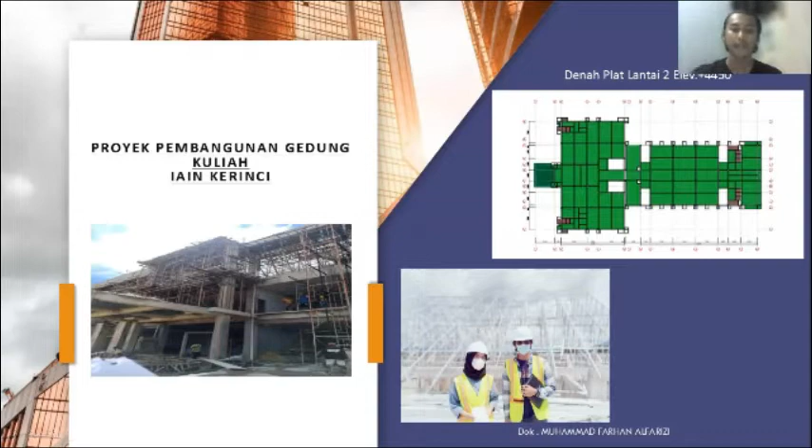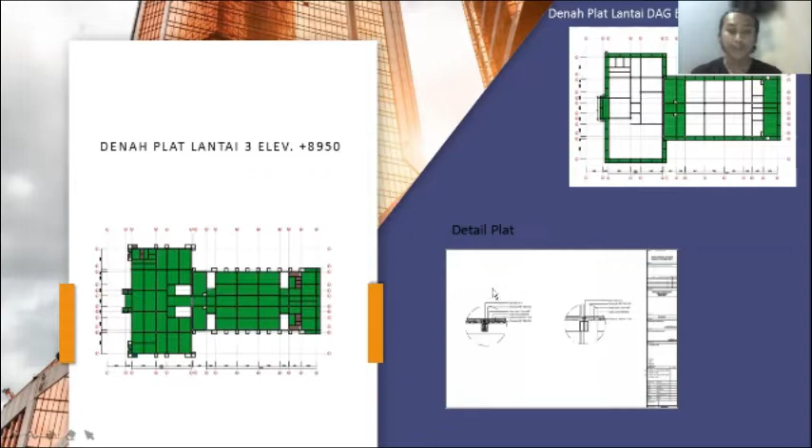Next, we can see floor plan 3, elevation 8,950, and this one is floor plan deck, elevation 13,500, and right here we can see plate detail. Next, we can see casting.

First, ready mix K175 concrete specification: compressive strength 175 kg per centimeter square, mixture cement 300 kg, split stone 1010 kg, stone ash 200 kg, sand 1 262 kg, sand 2 413 kg, water 180 liters, admixture 0.09 liter, density 2,365 kg.

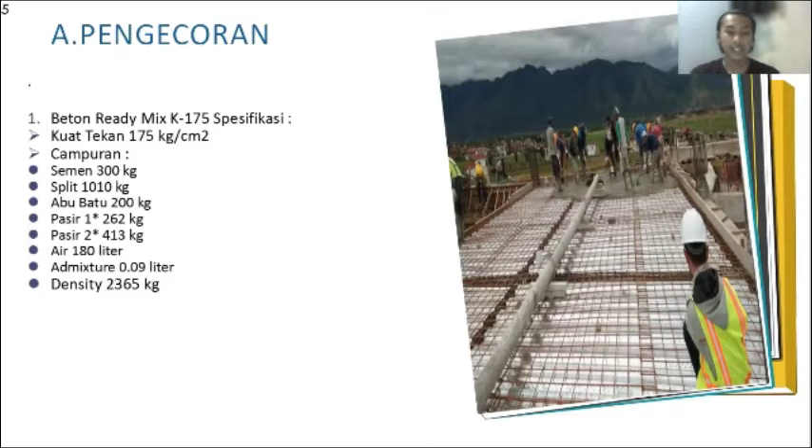Next, we talk about framework. Right here we can see plain iron. The specification is made of steel, size diameter 10 mm, BJTP 24 steel quality, good iron condition, straight and not rust. Next, we can see concrete wire specification, made of galvanized stainless, size 1 roll equal 1 kg. Wire is in good condition and does not rust.

Next, we can see wire mesh specification: wire mesh sheet, width 5.4 meters, length 2.1 meters, iron size 8 mm thread, box diameter 15 cm times 15 cm. Wire mesh is in good condition and doesn't rust. Next, we can see steel deck or smart deck specification: steel deck sheet, width 3 meter, length 1 meter, size 0.7 mm BMT, good condition.

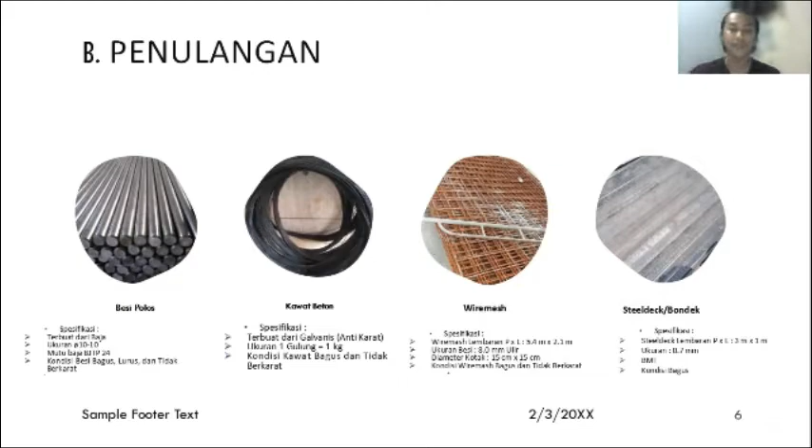In this slide, we can see formwork. The first one is multiplex specification, size 1,220 times 2,440 millimeters by 9 millimeters thickness, in good condition of wood, straight and not weathered. Next is batten specification, size 2 times 4 cm, B quality wood, good condition of wood, straight and not weathered.

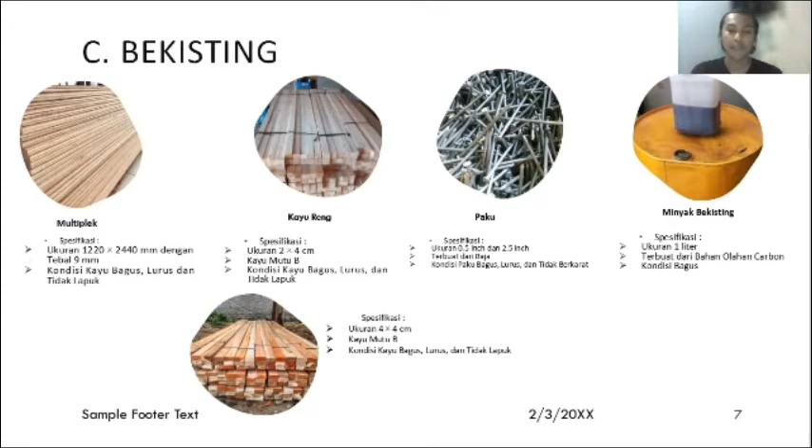Next is nail specification, size 0.5 inch and 2.5 inch, made of steel, nail in good condition, straight and not rust. Next is formwork oil specification, 1 liter size, made from processed carbon, good condition. Next, we can see block wood specification, size 4 times 4 centimeters, B quality wood, good condition of wood, straight and not weathered.

And next slide, we can see work method. In the implementation of the steel deck floor slab casting work on the IAIN Kerinci Building Construction Project, the implementation process is almost the same as conventional floor slab casting.

Next, we talk about steel deck working method. The use of steel deck on this floor slab in the process of making formwork is almost the same as conventional concrete slab. The difference is that steel deck is used as a formwork forming material to replace multiplex on conventional slab. The steel deck is a factory product, and for standard and strength, it has been designed by the company that produced this product.

Next, we talk about steel deck placement. The process is steel deck is lifted, then steel deck or smart deck is placed in a predetermined place. Steel deck is then compiled and placed by workers. Second, steel deck cutting. The process is as follows. After the steel deck has been arranged, it needs to be linked, and a special tool is used, a special clamp tool. But in this project, the steel deck is directly overlapped to be assembled.

Next, for the edges of this steel deck material plate, it is placed to support a minimum of 2.5 cm on the edge of the beam. The next step is the cutting process. In this project, the process uses a hand grinding machine. This cutter should use a special steel nibbler cutter tool. Nibbler cutter is a cutting tool specially designed for cutting steel materials. The steel deck part that exceeds the floor limit is cut according to field condition, as shown in the picture.

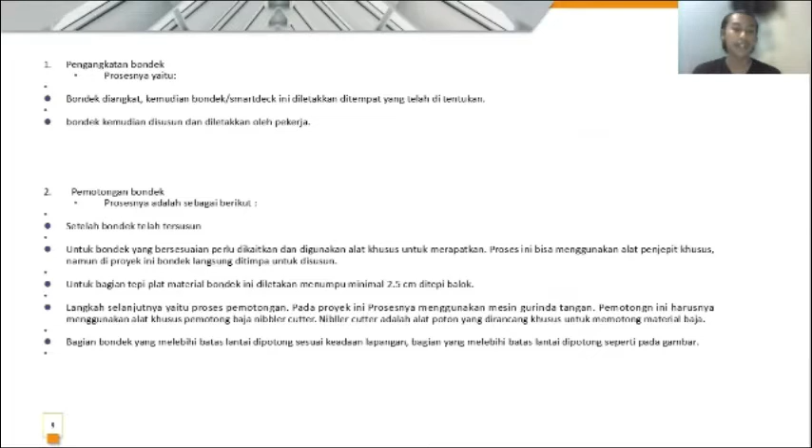The third is steel deck linking. How to do it? The first step is to place the stud bolt in the planned place, namely the edge of the steel deck and the steel deck beam. Then use a power gun to lock or link the steel deck.

Fourth, install end stop. The next step is to install an end stop that has a function so that later during the concrete casting process it doesn't spill. The end stop is attached to the edge of the steel deck by being bolted directly to the steel deck. But previously, the end stop was cut as needed with a hand grinder.

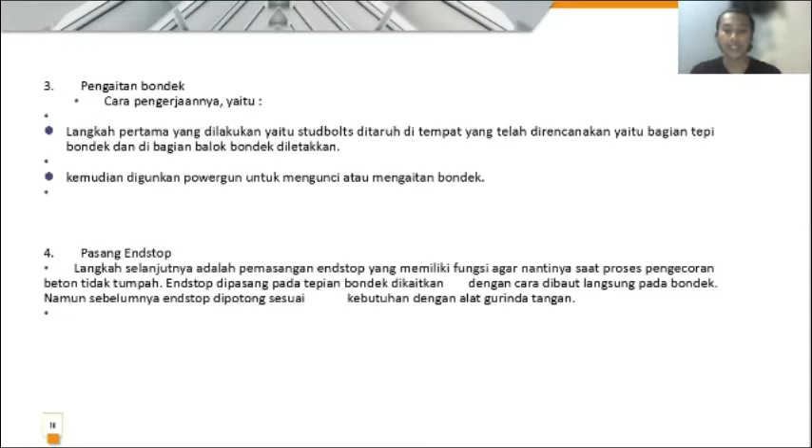Next, we talk about reinforcing. First one is shear connector installation. This work is done before placing the wire mesh sheet. Shear connector is a reinforcing steel that has the function of iron as a shear connector. The shear connector is welded on the surface of the steel deck plate, as well as a wire mesh support to be attached to the steel deck. The binding process applied in this project is by welding.

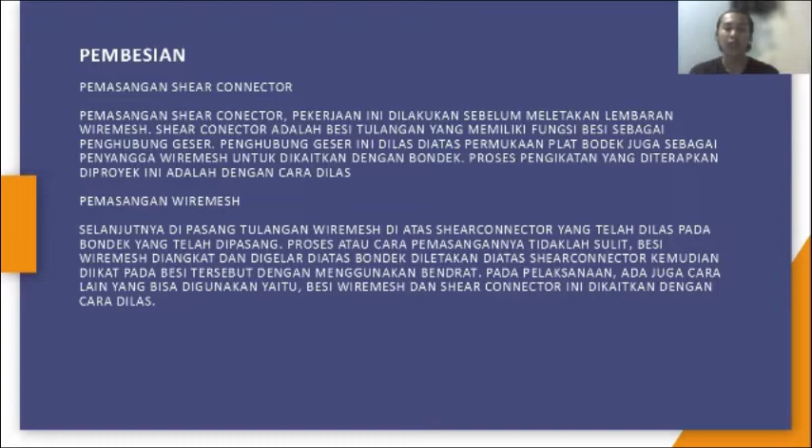Second, wire mesh installation. Next, the wire mesh reinforcement is installed above the shear connector that has been welded to the steel deck that has been installed. The process or method of installation is not difficult. The wire mesh iron is lifted and held over the steel deck, placed on the shear connector, then tied to the iron using a wire. In the implementation, there are also other ways that can be used, namely iron wire mesh and shear connector are linked by welding.

Next, we talk about casting. This process is not much different from casting on conventional plates. However, before the casting process is carried out, the first step that needs to be done is the installation of scaffolding that serves to support so that there is no decrease in the casting. The working steps of the casting process are as follows.

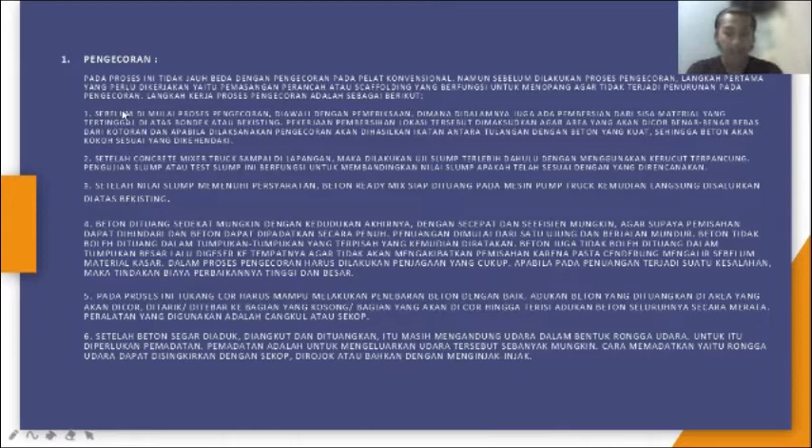The first one, before starting the casting process, it begins with an inspection in which there is also cleaning of the remaining material left on the steel deck or formwork. The site cleaning work is intended so that the area to be casted is completely free of dirt, and when casting is carried out, a strong bond between the reinforcement and concrete will be produced so that concrete will be solid as desired.

Second, after the concrete mixer truck arrives in the field, a slump test is carried out first by using a truncated cone. The slump test serves to compare the slump value whether it has been as planned. Third, after the slump value meets the requirements, ready-made concrete is ready to be poured on the pump truck machine and then directly distributed over the formwork.

Fourth, concrete is poured as close to its final position as possible, as quickly and efficiently as possible, so that separation is avoided and the concrete is fully compacted. Pouring starts at one end and goes backward. Concrete should not be poured in separate piles, which are then leveled. The concrete should also not be poured in large piles and then shifted into place so as not to cause separation, as the paste tends to flow before the coarse material. In the casting process, adequate care must be taken. If there is an error in casting, then the repair costs are high and large.

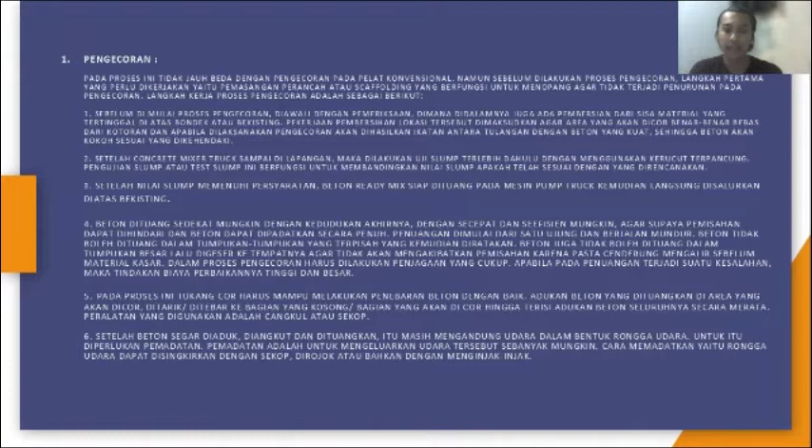Sixth, after fresh concrete is stirred, transported, and poured, it still contains air in the form of air voids. It requires compaction to remove as much of the air as possible. The air cavity can be removed with a shovel, rodding, or even by trampling.

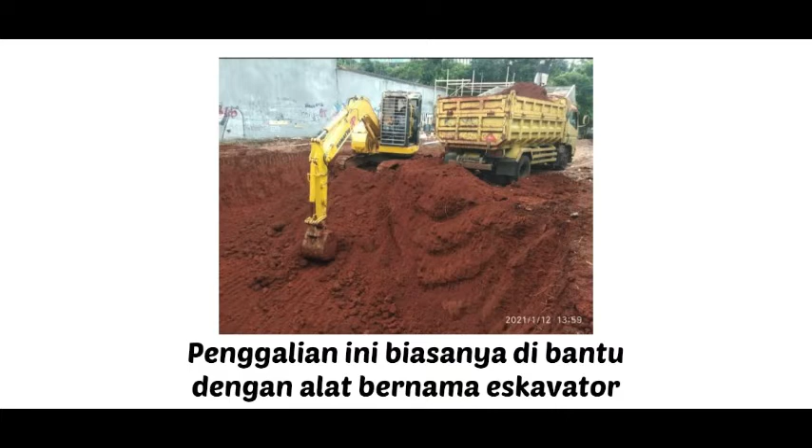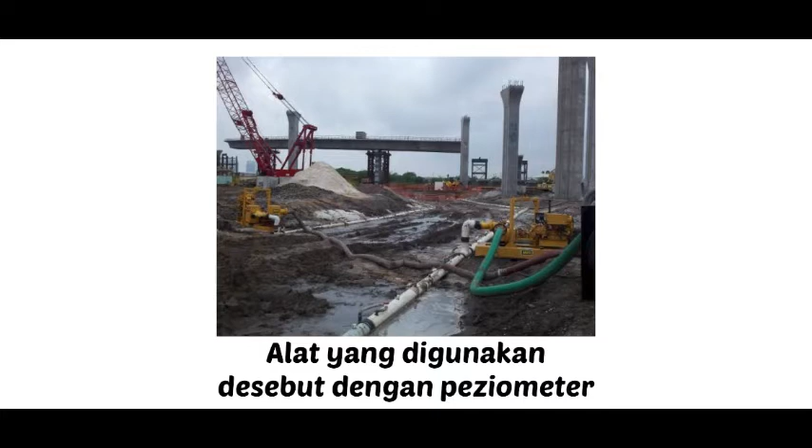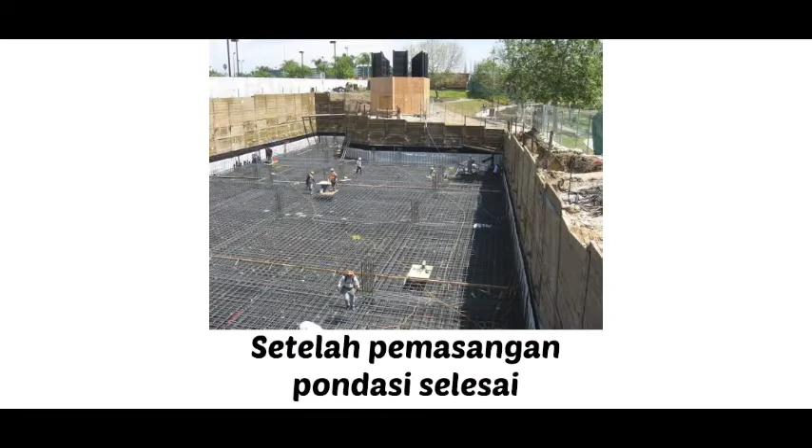This is about building basement construction. The first step is the excavation. This excavation is assisted by a tool called an excavator. Then the next step is the dewatering or draining the soil. The tool used for the dewatering is a piezometer. And the next step is the installation of foundation, usually with a pile foundation. After the foundation is complete, the next step is the manufacture of reinforced concrete, usually done manually.

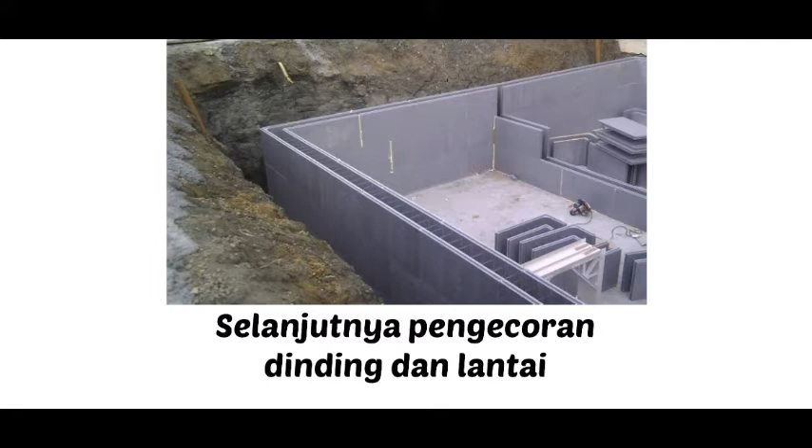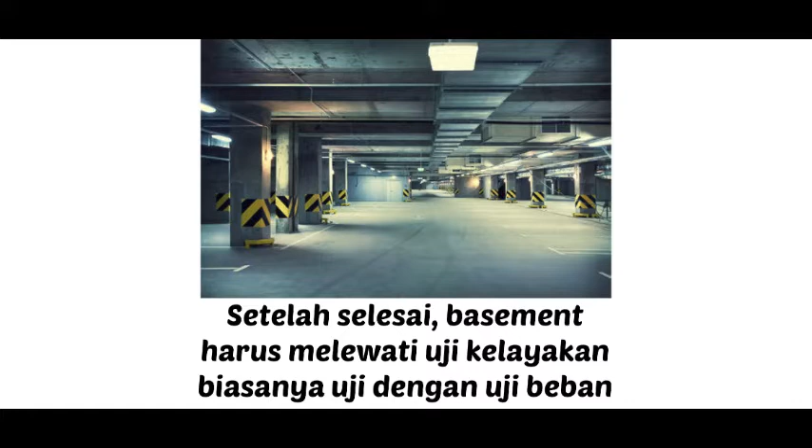And the next is the casting to make the walls and floors. The last is finishing, such as the installation of electrical installation and the water pipes. After completion, the basement must pass a feasibility test, usually using a load test.

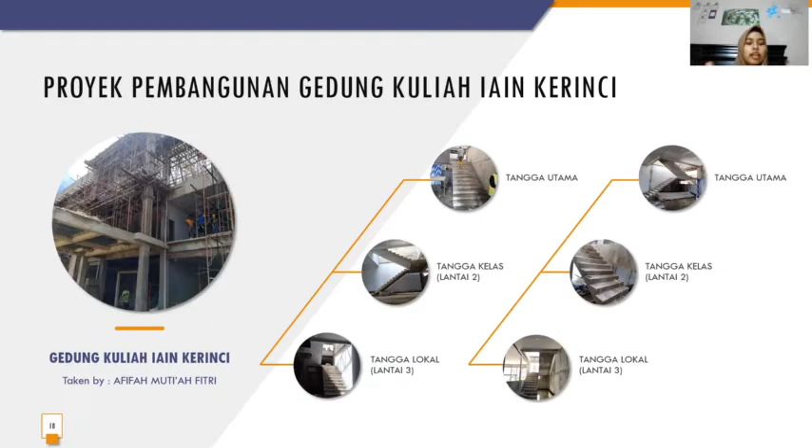And now I'm going to do a presentation about stairs. This is the building that I went to, exactly in IAIN Kerinci Sungai Penuh. And as you can see, there are the main stairs, class stairs on the second floor and on the third floor.

This part I'm going to show you how to make a cast concrete staircase. Number 1, make a stair foundation. Generally, the type of foundation used is a pair of river stone foundation, reinforced concrete, or you can also use a combination of both.

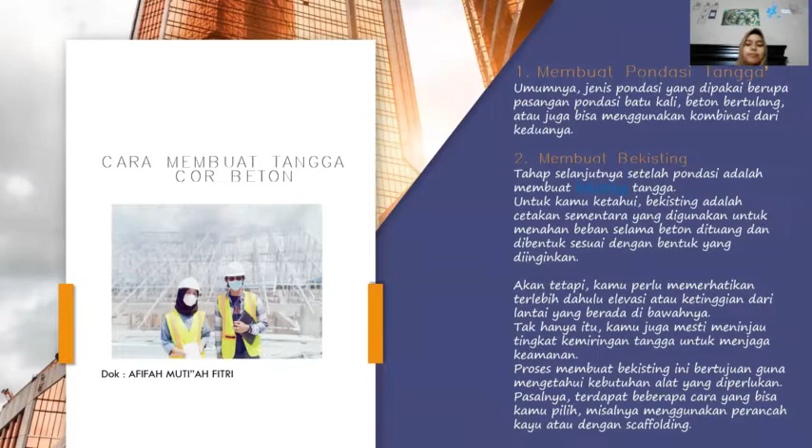Number 2, make framework. After the foundation is there, make the stair framework. You have to know the elevation or height of the floor below. But also you have to know the level of the slope of the stairs to maintain safety. Number 3, installing reinforcement of the body and building frame. First, you need to install the main reinforcement followed by a series using strap reinforcement.

Number 4, installation of stairs reinforcement. To avoid errors, the reinforcement concrete stairs will be continued to be poured of the stairs reinforcement by wire bonding. Then reinforcement was installed lengthening with the purpose to make the stairs stronger. Concrete decking is also installed on the same side as the form.

Now, if the progress of installation of the borders, reinforcement and the stairboard has been completed, you can install the stairs walls on the other side and the border walls at the upper part of the stairs body. This stairs wall form will be nailed to the stairs body form.

Number 5, casting progress. The casting progress must be performed entirely on the stairwell. After finish, lift a few times. Meanwhile, the progress of dismantling the walls of the stairs and the traps can start when the concrete has reached about 12 hours. This is to review the strength of concrete.

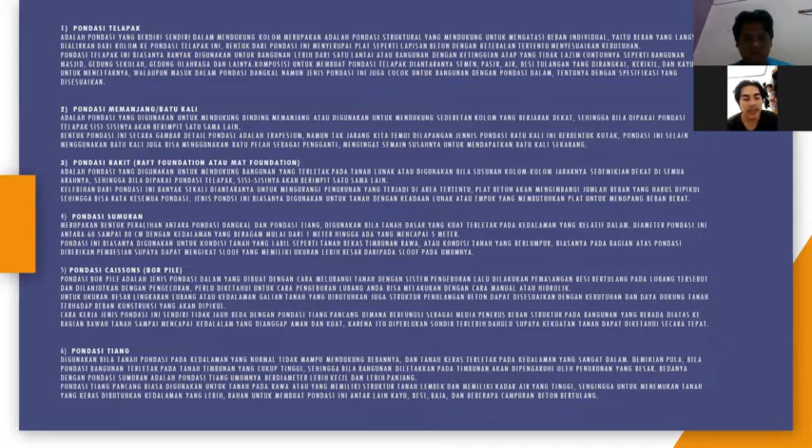Number 3, raft foundation or mat foundation is a foundation that is used to support buildings located on soft soil or used when the columns are so closely spaced in all directions that if a flat foundation is used, the sides will coincide with each other.

The advantages of this foundation are many, including to reduce the settlement that occurs in certain areas.

The concrete slab will compensate for the amount of load that must be carried so that all foundation can be flat. Number 4, well foundation is a transition between shallow foundation and pile foundation, used when the strong subgrade is located relatively deep.

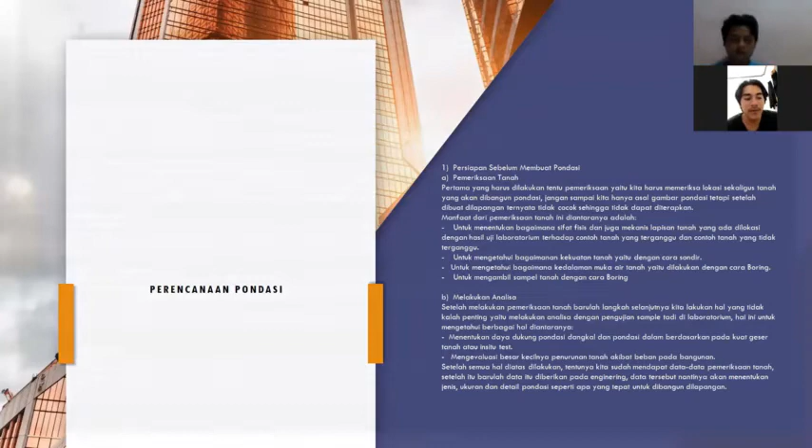The diameter of this foundation is between 60 and 80 cm, with various depths ranging from 1 meter up to 5 meters. The foundation is usually used for unstable soil conditions, such as former swamp embankment soil or muddy soil conditions. Usually the top of the foundation is given iron so that it can bind the sloof, which has a larger size, than the sloof in general.

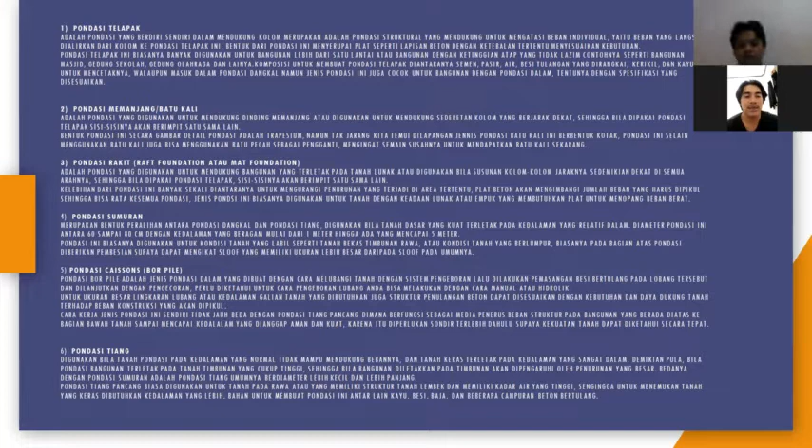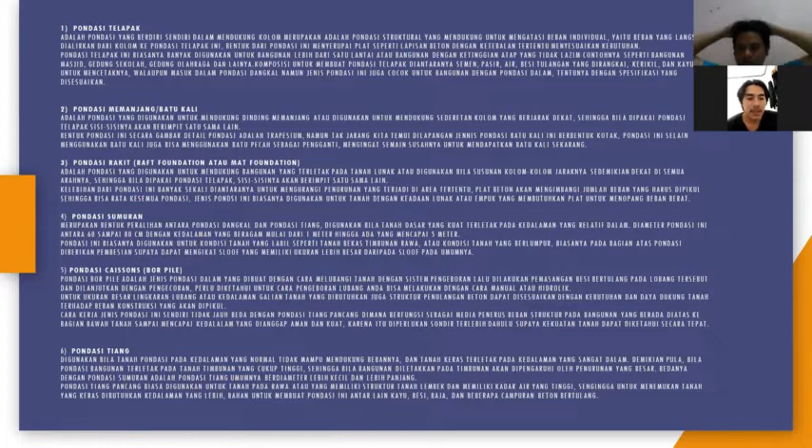Number 5, bored pile foundation. Bored pile foundation is a type of foundation made by perforating the ground with a drilling system and then installing reinforced iron in the hole, followed by casting.

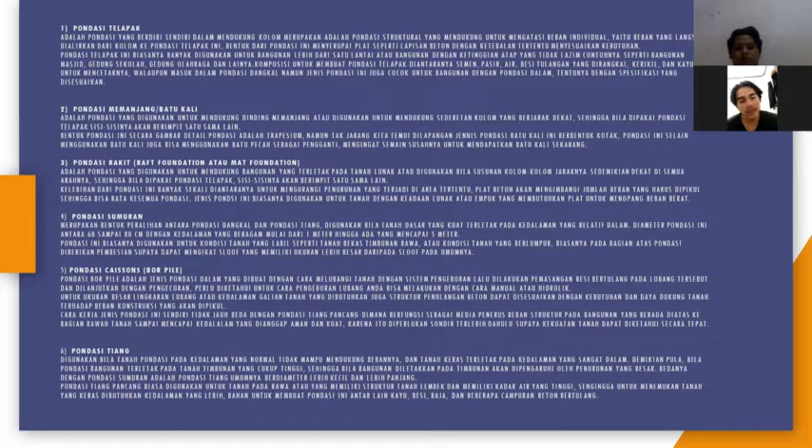Please note how to drill holes. You can do it manually or hydraulically for the large size of the hole circle or the required depth of soil excavation. The concrete reinforcement structure can also be adjusted to the need and carrying capacity of the soil and the construction load to be carried.

Number 6, pile foundation, used when the foundation soil at normal depth is not able to support the load, and hard soil is located very deep, like this. Or if the foundation of the building is located on a sufficiently high embankment, so that if the building is placed on the embankment, it will be affected by a large settlement. The difference with the well foundation is that the pile foundation is generally smaller in diameter and longer.

Okay. Next, I will continue the presentation of foundation planning. Number one, preparation before making the foundation. A. Soil inspection. The first thing that must be done of course is inspection. Normally, we have to check the location as well as the soil to develop the foundation. Lest we just come up with a foundation drawing, but after it is made in the field, it turns out not suitable, so that it cannot be applied.

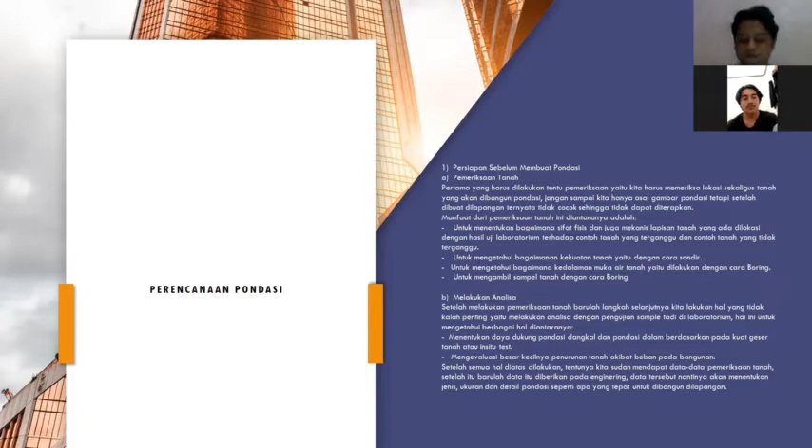After all of the above is done, of course, we have got data from the soil inspection. After the data is given to the engineer, the data will later determine the type, size, and detail of the foundation that is right to build. C. Limitations of the above construction. The condition of the area of the site, time and cost of work. The type of foundation that is solid, right and strong.

In planning a foundation, several things must normally be fulfilled. The foundation must be placed properly so that it doesn't slide due to external influences. The foundation must be safe from failure of bearing capacity. The foundation must be safe from excessive settlement. That's why I have been explaining the understanding of foundations. The analysis in planning is performed considering several things in choosing the appropriate type of foundation. Of course, we must refer to the applicable loading regulation or SNI.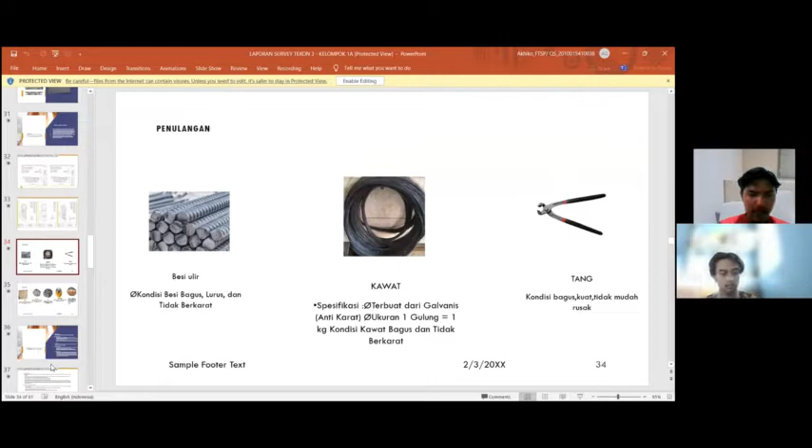Beam materials: 1. Iron. 2. Wire. 3. Pliers. Formwork: 1. Plywood. 2. Battens. 3. Nails. 4. Formwork oil.

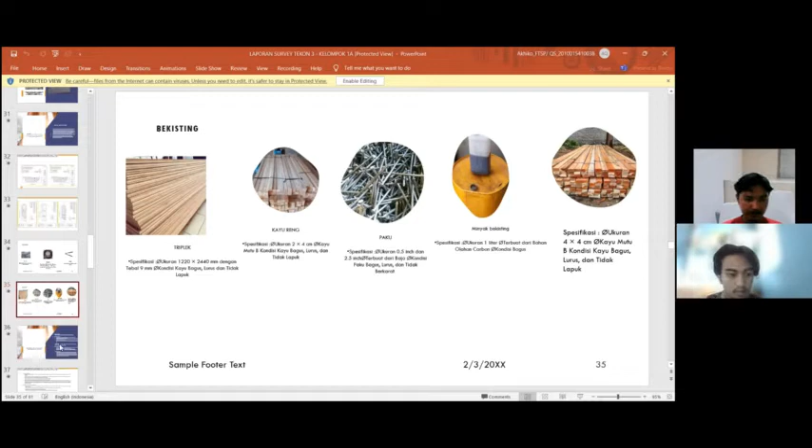Method of implementation of beams. Number 1: Scope of work. Iron work, formwork work, and foundry work.

Number 2: Preparatory work. Manufacture and submit sub-drawings for concrete block installation work, and approval of material to be used.

Number 3: Measurement. The surveyor takes measurements with a water pass and gives a mark for the position of the concrete beams placement point.

Number 4: Ironwork. Reinforcing or assembling reinforcement is done in another place that is more convenient. Iron assembly must be in accordance with working drawings.

Number 5: Formwork work. Installation of the screw can use nails as adhesive. The nails are nailed using a hammer.

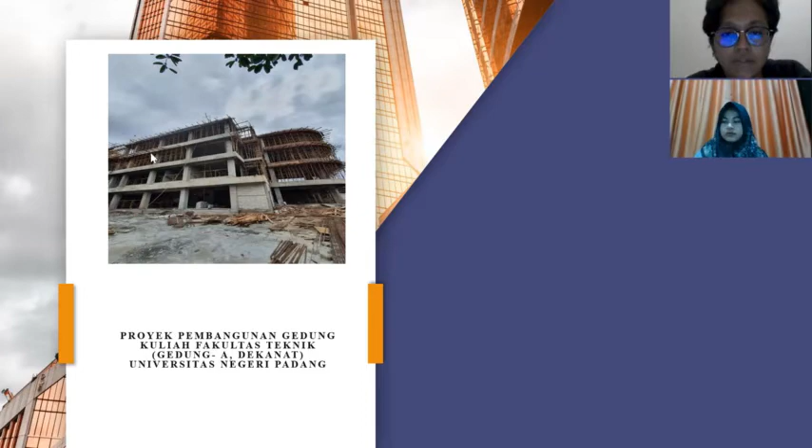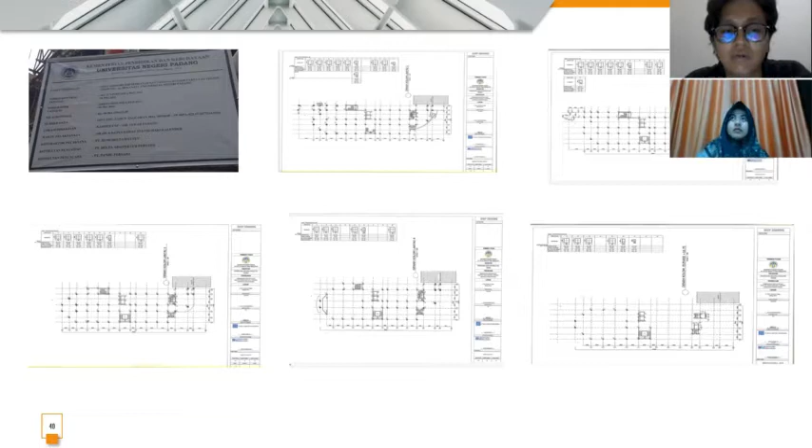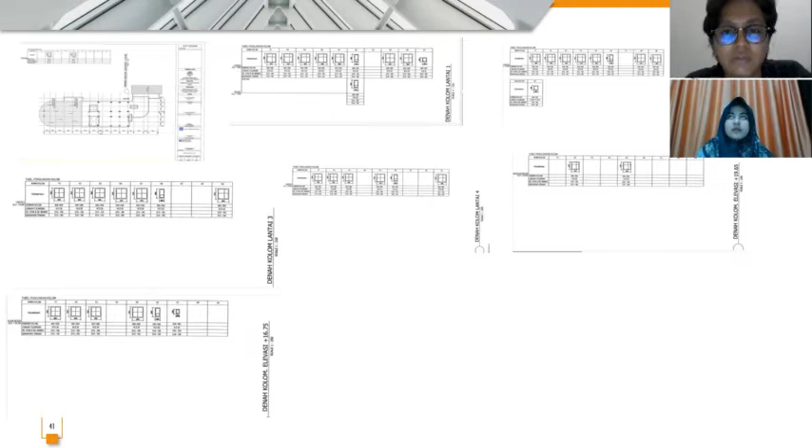On this slide, there are attached sub-drawings of the column work. In this sub-drawing, we can see the detail of column dimension and the column iron details, from the first floor to the 4th floor. Next, this is the documentation of our survey.

Next is work materials. A: Foundry. In this foundry, we are using concrete K250. The specification is A: the compressive strength is 250 kg per centimeter square.

B: The mixture. In this mixture, we are using cement 350 kg, split stone 1010 kg, gray stone 188 kg, sand number 1 247 kg, sand number 2 388 kg, 180 liter of water, and admixture 0.11 liter.

C: Density. We are using density with 2,374 kilogram. Next, B is reinforcement.

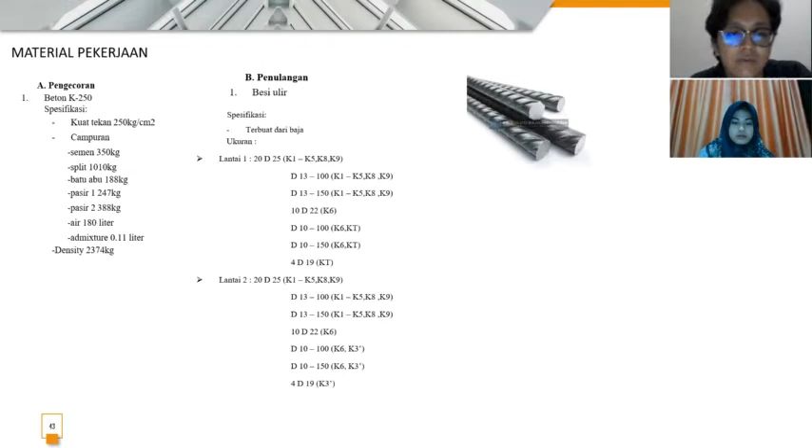Number 1 is iron screw. The specification is the iron screw is made of steel. In this slide, we can see the diameter and the number of iron screw we are using from the first floor to the fourth floor.

Next is the same with the previous slide.

Next, number two is concrete wire. The specification of this concrete wire is that it is made of galvanized material, which is anti-rust, and one size of this concrete roll is 1 kilogram. Wire must be in good condition and not rusty.

Next, C is formwork. In this formwork, we are using multiplex 9mm. The specification of this multiplex is using size 1,220 times 2,440 millimeter with a thickness of 9mm. The condition of the wood is good, straight and not rotten.

Next is number 2: battens. The specification of this batten is using the size of 2 times 4 centimeter. The condition of the wood is good, straight, not rotten, and has B quality wood.

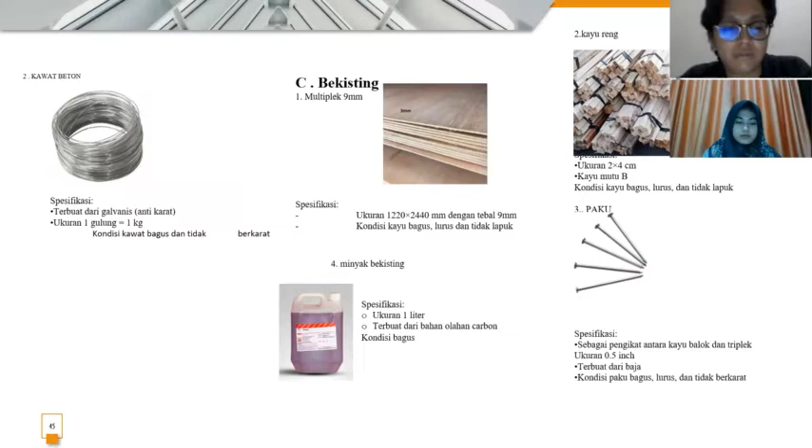Next is job method, and my friend will be presenting this job method.

Column dimension according to the attached shop drawing. Reinforcement assembly: 1. After the slab has hardened or cured perfectly, the next job is column work.

2. Assemble two column reinforcements by spreading the iron according to the size and dimension that have been set. Then make the stirrup reinforcement according to the size and dimension set. Cut the stirrup iron with a bar cutter as needed, then bend it using a bending tool.

After the stirrup is finished, arrange the stirrup on the previous string of column reinforcement with a distance of 100 mm for the support and 150 mm for the field.

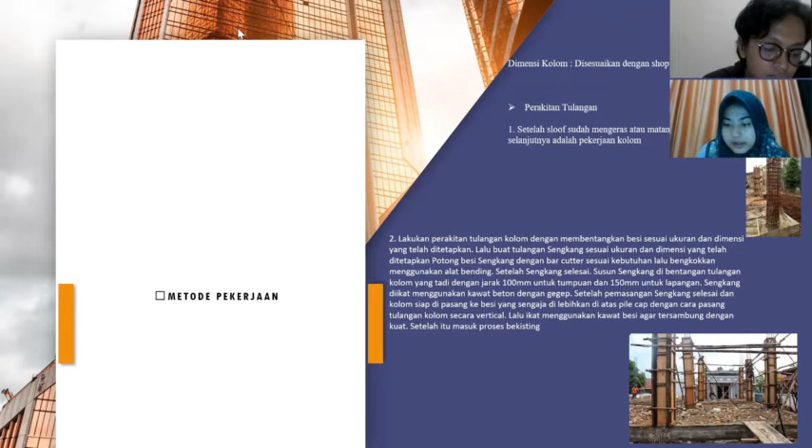The stirrups are fastened with concrete wire tightly. After the installation of the stirrup is complete and the column is ready, attach the iron that is intentionally added to the pile cap by installing vertical reinforcement for the column, then tie it with iron wire so that it is firmly connected.

After that, enter the formwork process. Next, the formwork.

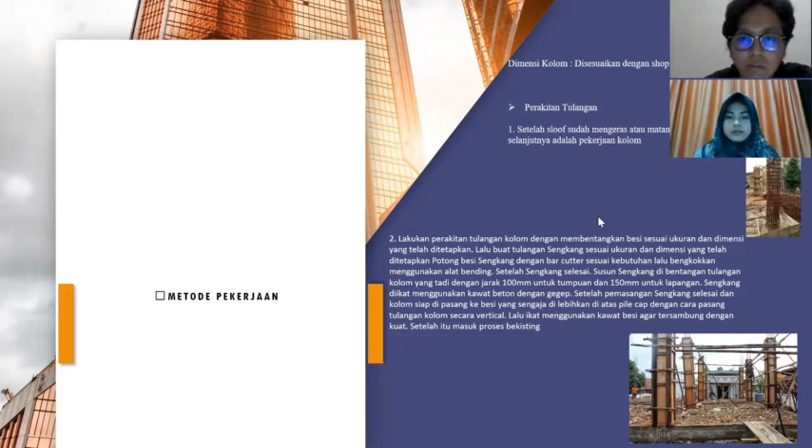After the reinforcements stand firmly, next is the installation of the formwork. Measure the height and width needed for multiplex and battens with a tape measure for formwork, then cut it using a saw.

Attach the battens to support the formwork using nails and a hammer. Next, casting. After the formwork is finished, perform the casting process.

Using K250 ready-mix concrete, which is channeled to the concrete pump first, the funnel of the concrete pump is directed above the mouth of the column formwork, assisted by a coordinator using a ladder, while compacted using a concrete vibrator.

After the cast column is full and solid, wait until it hardens, and after the column hardens, remove the formwork from the column.

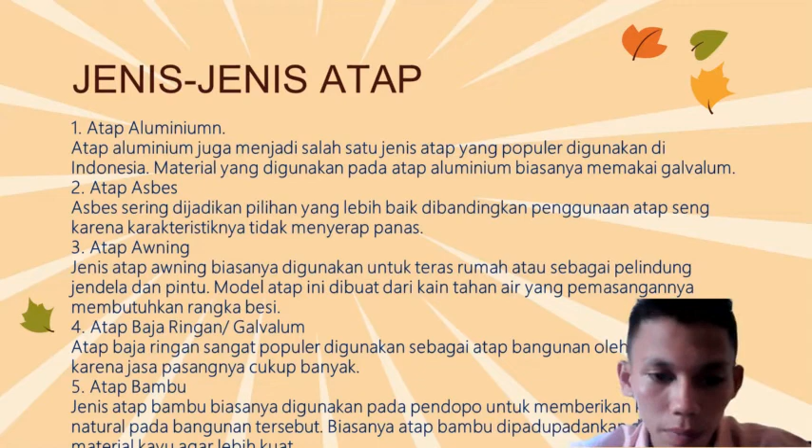Roof implementation methods: prepare, manufacture, and submission of shop drawing for roof covering work, approval of material to be used, work area preparation.

Preparation of work materials include zincalume, light tile, roof ridge, dynabolt, and screws. Preparation of work tools include scaffolding, water pass, meter, water hose, electric drill, cutting wheel, and thread.

Measurement first: do a field survey for the area where the light tile roof covering will be installed, and determine the leveling height of the lightweight steel roof truss.

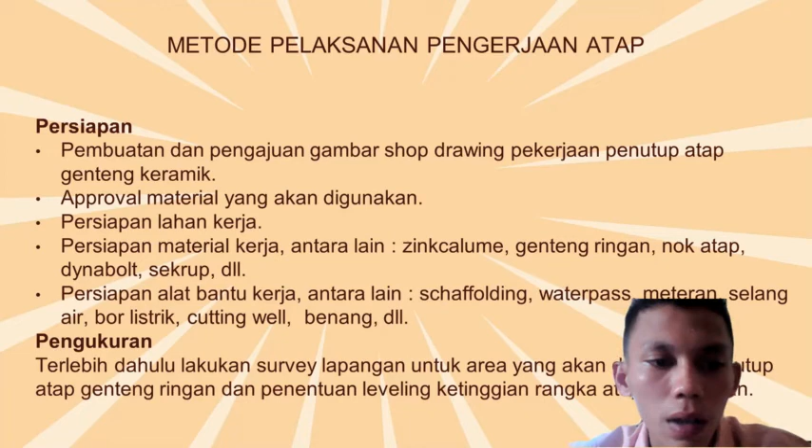Steel roof truss fabrication and installation. The steel roof truss begins fabrication when the upper floor column is installed. Assuming the ring beam has finished casting, the steel truss is ready to be installed.